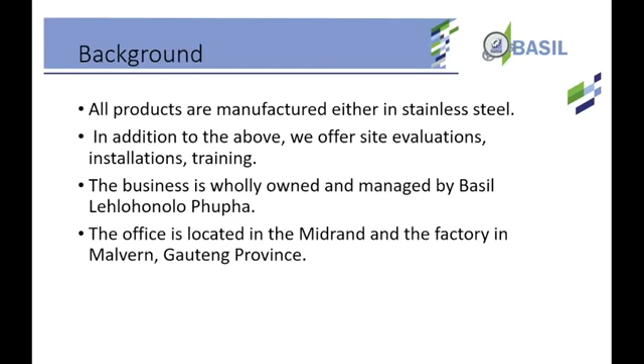In addition, we do installations, site evaluations, and training on the equipment we supply. I will go into the equipment and the opportunities available for the youth, because this equipment will unlock opportunities for youth, demonstrated through agricultural institutions, self-help schemes, or entrepreneurship.

I will start by presenting the poultry equipment that we manufacture. I'll break it into three categories: breeding of poultry, egg production, and meat production.

In breeding equipment, we manufacture nest boxes placed in the breeding houses, and we supply feeders and drinkers also placed in the breeding houses, so the hens or chickens can lay their eggs in a good environment, and the clean eggs can be placed for hatching.

We also manufacture egg incubators in small and medium scale. These incubators are made in galvanized steel and powder coated after, with insulation. We've been manufacturing this equipment for quite some time. I personally have over 10 years in the industry, but I have people with over 30 years in this industry, so they can assure the equipment does what it's supposed to do.

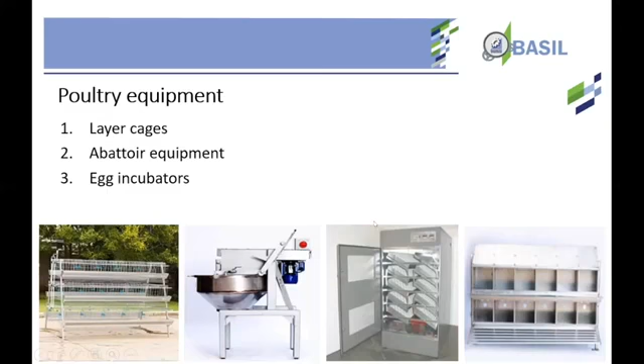I will play a small video clip showing the chicken abattoir, the main equipment used in chicken abattoirs for small and medium scale farmers.

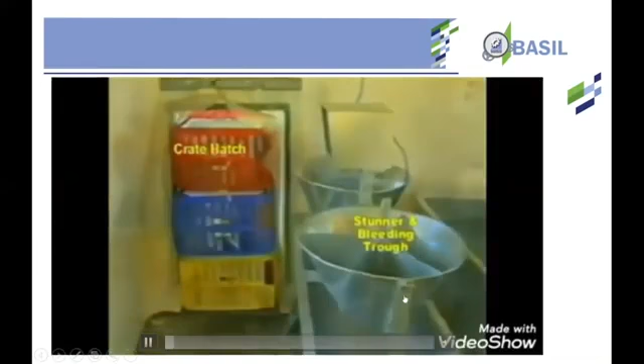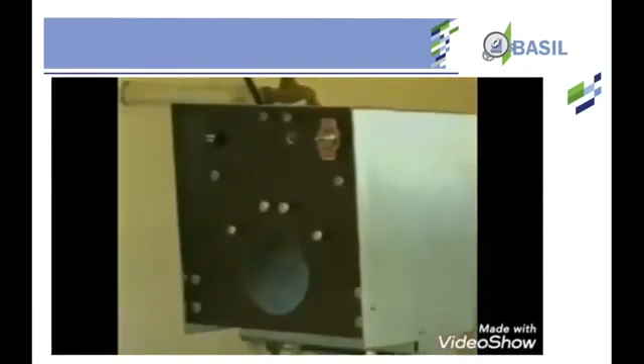This is how the equipment looks like. Here we have a stunner bleeder, a scalding tank, and a tilting bowl plucker.

The stunner bleeder is used in the chicken abattoir so the chickens can be stunned. After they are slaughtered, they bleed out the blood, and they can be scalded, and later on plucked to take the feathers off.

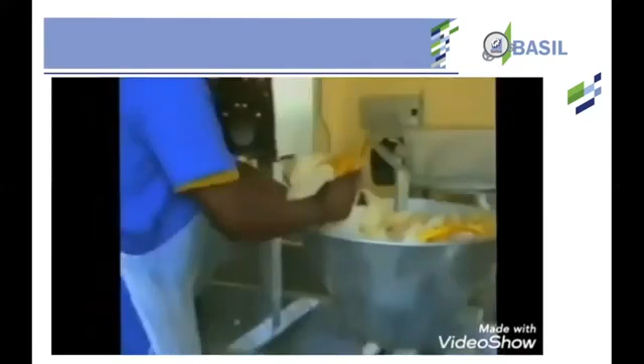That lady is stunning the chickens and putting them in the stunner bleeder, then it goes through the process of slaughtering, and thereafter the chickens are placed in the scalder and then plucked.

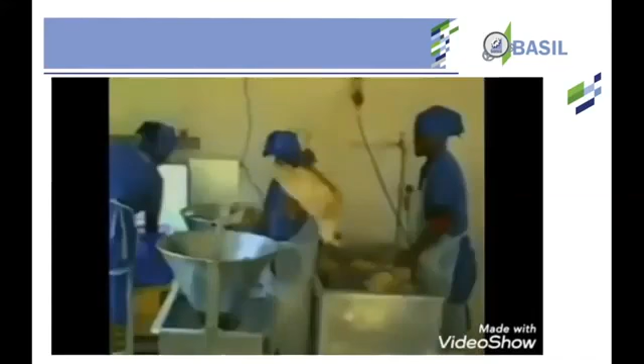We manufacture the hygiene equipment too: boot washers, hand basins, knife sterilizers. All this equipment is manufactured by us here in South Africa.

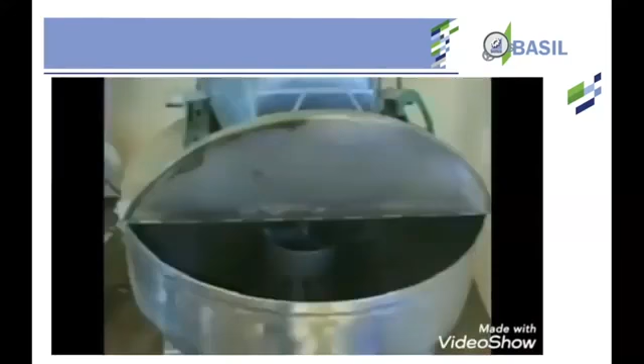The chickens go through the scalding process with water at about 55 to 60 degrees Celsius. The scalding takes approximately 1.5 to 2 minutes.

This plucker is used to take the feathers off the chickens.

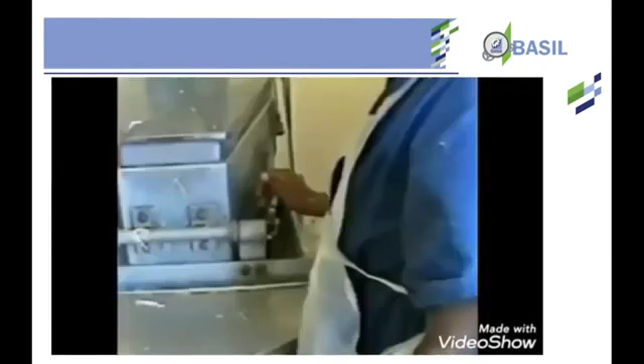After plucking the feathers, the chickens go to eviscerating troughs to take out the intestines, then final cleaning and washing, then they drip water from deep cooling trolleys, and afterward the chickens can be cut into portions and packaged or put in cold or freezer rooms.

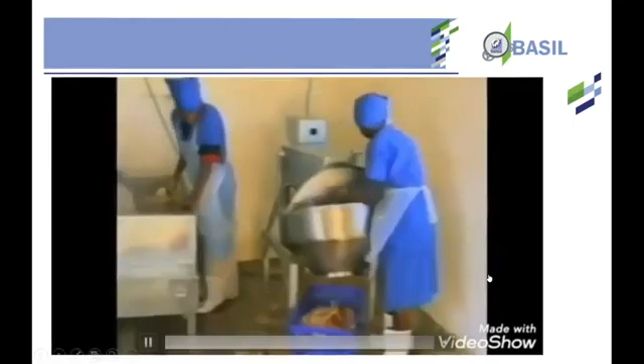This is our chicken slaughtering equipment available for youth who want to take advantage of this opportunity. The nice thing about an abattoir is it doesn't have to be just for personal use, it can be used for other people as well.

It can be used in agricultural institutions to train farmers on how to further process chickens, because most people just raise chickens and sell them as live birds, but there's an opportunity to slaughter chickens and add value so they can be market ready.

I will go next to fruit and vegetable processing. We also manufacture fruit and vegetable processing equipment, such as fruit juice finishers, pasteurizing, and fruit drying equipment.

This equipment can be used to process soft fruits such as mangoes, marulas, guavas, and many more, as well as soft vegetables such as tomatoes and others.

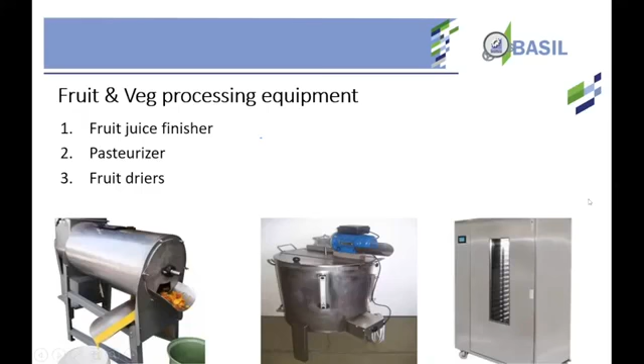I will play a small video clip of tomato processing, where people use this equipment to make and create tomato paste.

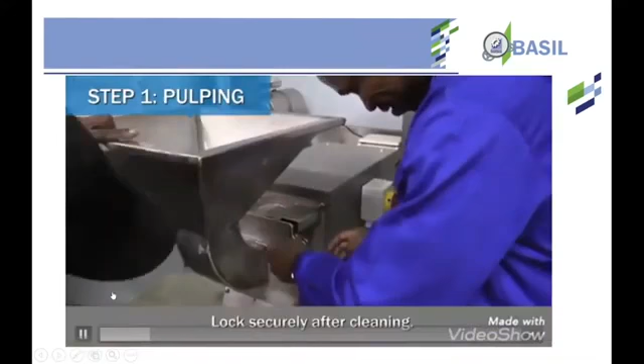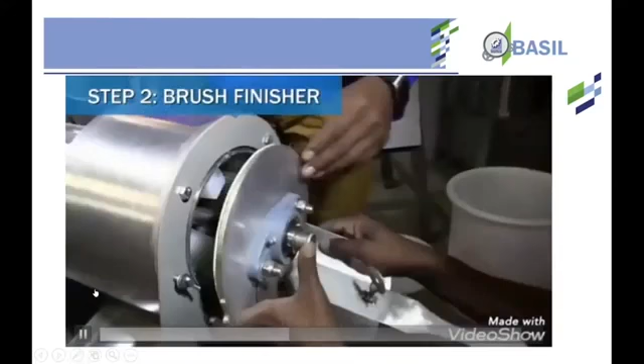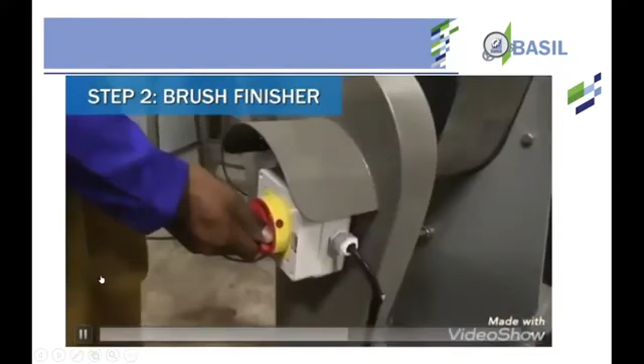From the processing point of view of fruits, we manufacture equipment from wash troughs to wash the fruits as they come in, sorting machines and sorting tables, pulping machines, fruit juice machines, and brush finishers that separate the skins of fruits and vegetables from the pulp. This brush finisher uses brushes, and we use different size screens to make sure the type of fruits or vegetables you are processing is suitable.

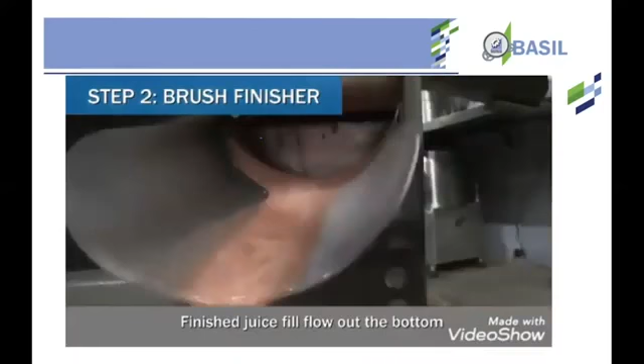We don't just manufacture one or two pieces of equipment, we manufacture the whole set so that we can tailor make according to your specifications and your needs. We make sure our clients get that benefit of getting what they want for their end product.

This is just a video clip showing the juice separated from the tomato pulp, and the seeds and skins.

Furthermore, I will introduce our oil processing equipment that is being used in most countries like Namibia, Botswana, and Eswatini. This equipment is mainly used to process nuts and seeds such as marula, sunflower, moringa, and other types of seeds and nuts.

We've got the dehusking equipment for seeds such as moringa and peanuts, to take the shells off the nuts before you can further process it.

We have the cold presses to extract the oil from these seeds. And furthermore, we've got the oil filter to purify the oil that is being extracted.

This equipment we've just installed in Zimbabwe, where we installed the full operational processing house. They process marula fruits from washing and sorting, extracting and separating the skins and stones from the pulp or juice, up to filling of the final product.

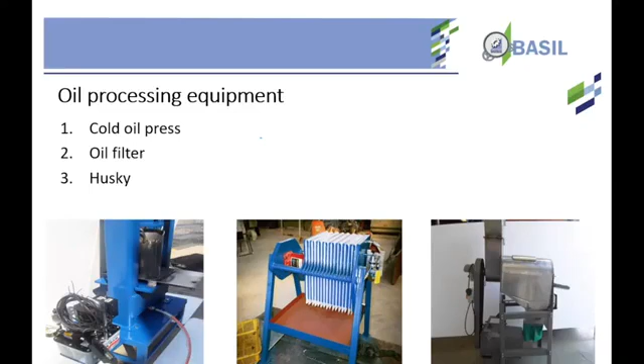I will just show you, this is the picture of our cold press to press the seeds and nuts.

We have peanut butter processing equipment to process peanuts from raw peanuts up to the filling of the peanut butter. We manufacture this peanut butter plant for small and medium scale farmers, entrepreneurs, or small businesses that want to get into the business of processing nuts to make peanut butter.

From roasting peanuts, dehulling peanuts, and peanut grinding, to actually filling the final product into bottles and labeling them, we manufacture this small scale equipment.

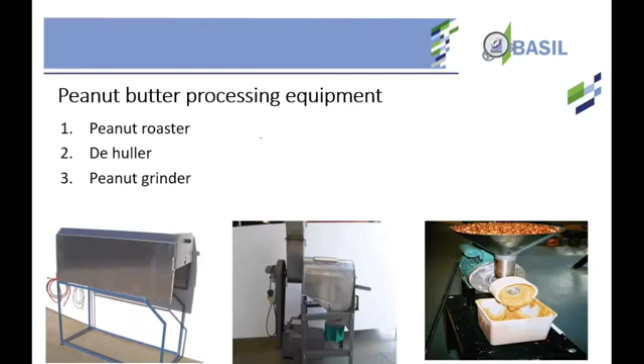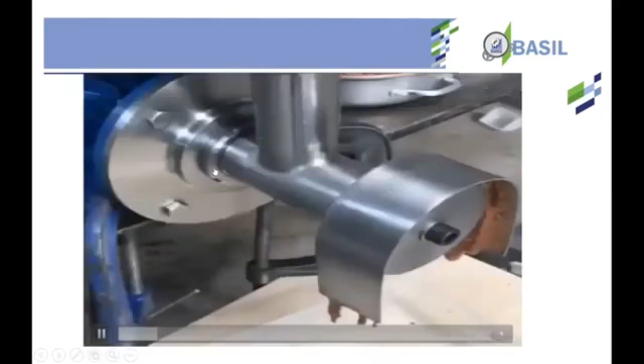This is just a short video clip of the peanut grinder. We just tested this, showing how the grinder actually grinds the peanuts to make or become peanut butter.

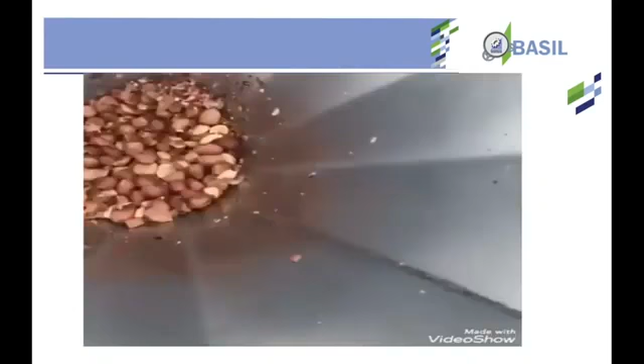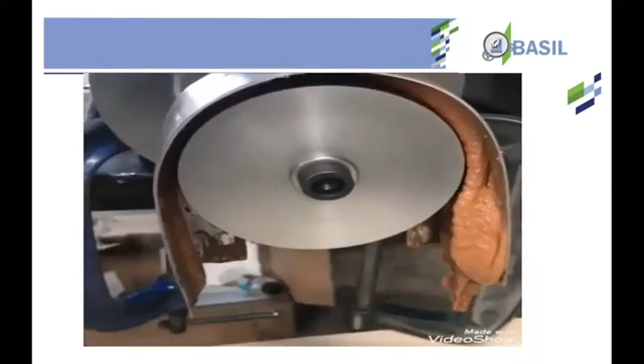We've supplied these to various places in South Africa. There's a person manufacturing peanut butter from the Free State province in Bloemfontein, and there are people manufacturing peanut butter here in Johannesburg for the correctional services. They are using these machines to process the peanuts to become peanut butter.

So Africa, I believe, has got enough fruits and vegetables to add value on.

The recent projects we've worked on include the tomato paste project in Eswatini, where people are making paste from tomatoes; the layer cages we supplied in Mozambique; the marula processing equipment we installed and commissioned in Zimbabwe; and the chicken abattoir equipment we supplied in Rwanda for our client, the Rwanda Institute for Conservation Agriculture, RICA. I still have to go there to install the equipment sometime this year.

I believe all this equipment will unlock opportunities for the youth, so they can be in the agricultural agro-processing space and add value to produce. Farmers who already have fruits and vegetables can process them, add value to their produce, make a living, and employ more people, especially more youth.

That is in South Africa. We've dealt with different agricultural institutions in South Africa, including the institution in the Eastern Cape, and institutions in Botswana. Now we are dealing with the agricultural institution in Rwanda, so that the youth can be trained and motivated through all these initiatives, to create more jobs and more value for their country.